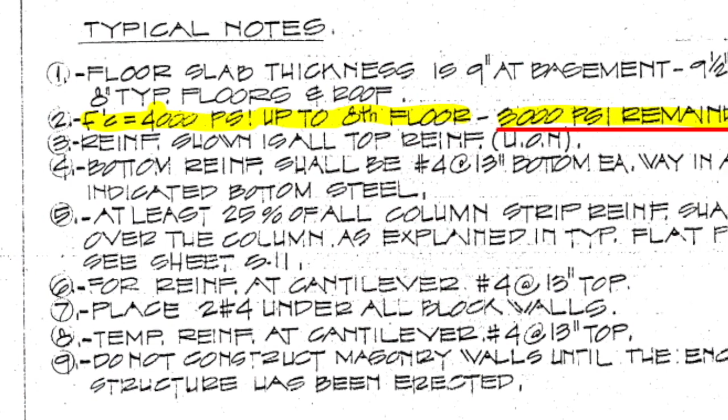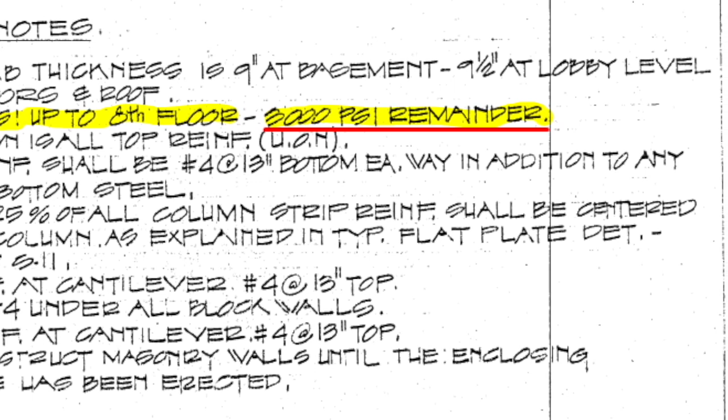And I'm like, wow, that span appears to be pretty long for the thickness of the slab up in the towers. And then also, which seemed a little bit odd, but might have been the case back then, the concrete strength was fairly low, at least what was indicated in the permit drawings. So it initially caught my eye, that they might have something called punching shear stresses that could be on the high side.

Because of what appears to be progressive collapse, what do you believe to be the main contributing factors? Well, of course, this is going to take some time to really see what happened there. And unfortunately, a lot of the evidence is going to be at the bottom of the rubble pile and may actually be destroyed, whatever video evidence there is. But having the existing drawings provides a blueprint to model the building and see if the building itself may have had some design weaknesses that could have contributed to the ultimate progressive collapse or disproportionate collapse of the building.

What might forensic engineers examining the collapse be looking for to determine the cause? What did they do? So with the drawings, as I said, you can start to model the building from top to bottom. And then from those models, you can see, does it meet code today? Did it meet code back then?

From the rubble pile, you can actually start to test some of the materials to see what was actually constructed. Was it constructed with the right strength concrete? Was there a little reserve capacity? A lot of times concrete comes up higher than specified. Hopefully they find some of the reinforcing steel at the base of the building and see if there were any signs of excessive corrosion, in particular in some of the columns and beams at those lower levels.

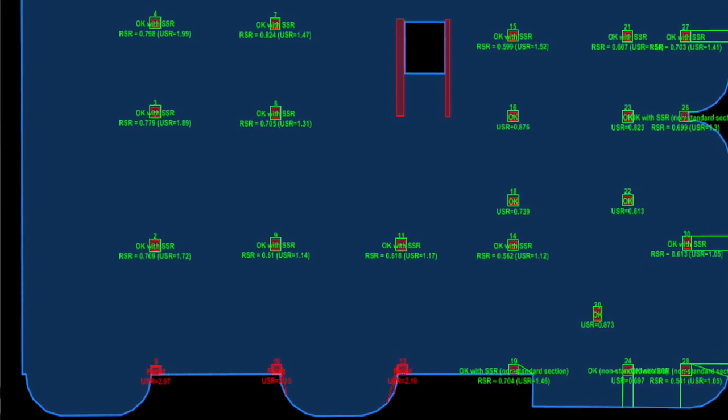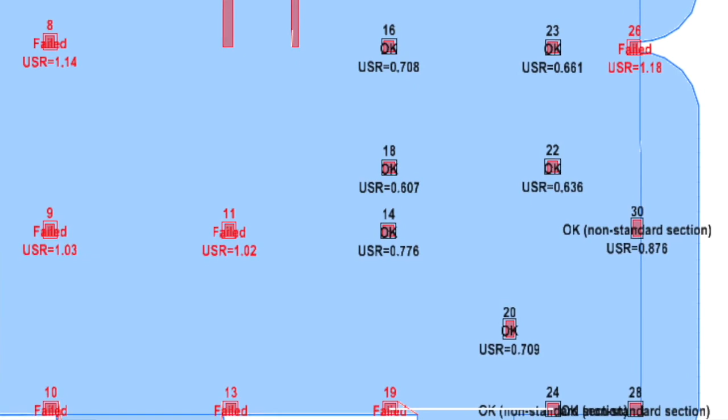So we modeled the floor slab in a 3D analysis software. And actually, it appears based upon loads that would have been used for the design that there might be some punching stresses that are actually exceeding code allowable. Which wouldn't necessarily cause failure, but now you're starting to eat into the safety factors that are inherent in the code that provide some reserve capacity.

Another key and important issue as well is back then, analysis methods that were available were fairly sparse. One thing that was added to the code after that design is something called structural integrity steel. And that was a result of other collapses that had occurred, such as the Murrah building in Oklahoma City, and finding ways to make a building more resilient and redundant and provide alternate load paths.

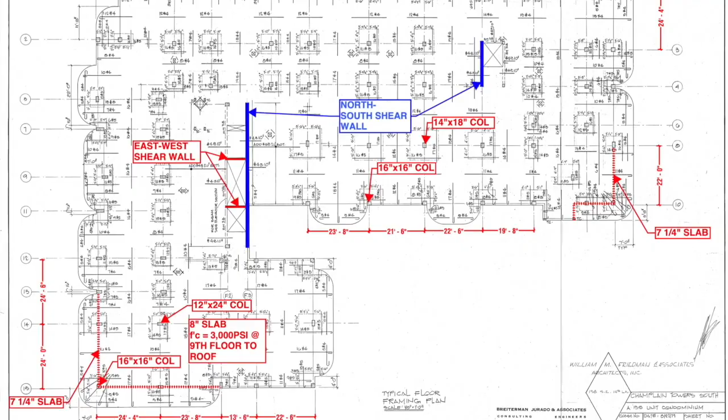So if you do have failure of a column, ideally you don't have failure of the rest of the building. And at that point, no buildings had that in there as part of the design. It would be something that creates a weakness in the building under a catastrophic loading scenario like this. We looked a little bit more through the drawings and found a couple other things that were a little bit concerning. And again, you're not looking to point the finger or blame, but it's something that's worth taking a look at in more detail and analyzing the building as it was built or as it was permitted.

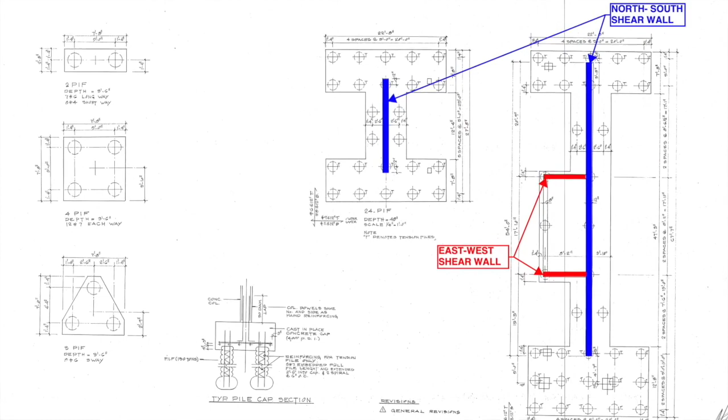Shear walls in one direction of the building were pretty short, and there are only two of them. So what may have happened too is if something failed somewhere else in the building and started pulling the building sideways, the slab column joint would have now been helping with lateral capacity in the building, which could have overloaded the columns and the slab column joint in punching shear. Of course, I'd imagine over 40 years, this building has been through some decent wind occurrences, so it must have enough capacity for that.

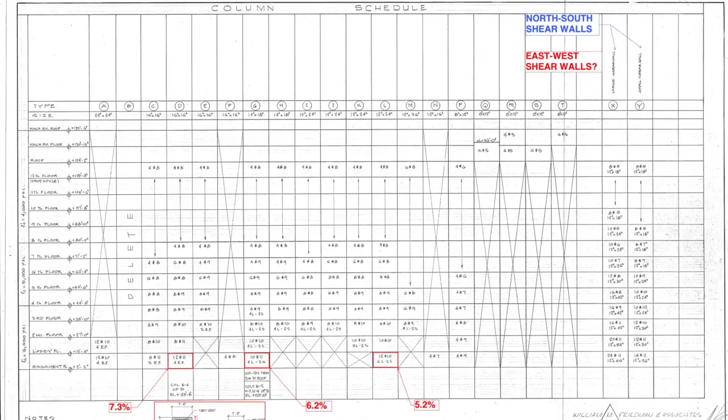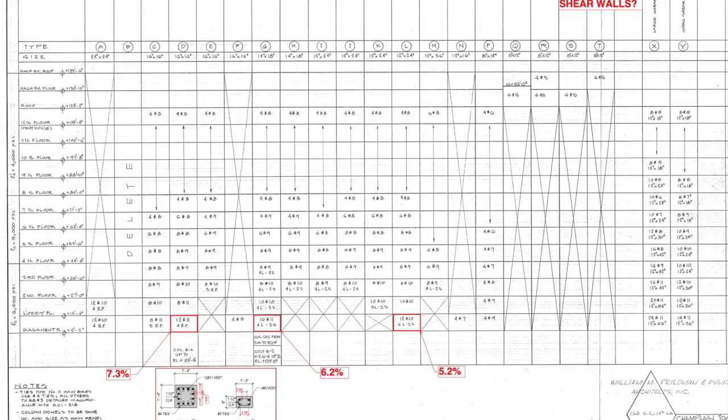Some of the witnesses who were in the building once said the building swayed like a sheet of paper. And that may have been due to the fact that the shear walls in one direction were really pretty sparse. The other thing that we noticed is that some of the columns at the base of the building retained their small size and were very heavily reinforced. And if special mechanical splices weren't used for that vertical reinforcement, by code, they actually might be considered over reinforced, which is not necessarily a good thing. Sometimes too much rebar is not a good thing.

So getting concrete consolidated around the rebar and the splices gets difficult with the more steel that you put in there. And judging by some of the photos, there was punching shear failure at the ground level. So it could be that one of those smaller columns, once it lost the lateral support of the slab, all of a sudden under that high compressive load, it wanted to buckle sideways, and there was nothing to keep it from moving. And that could have led to loss of a column and then collapse throughout the building.

What are high punching shear stresses and punching shear failure, and how may they have been a factor in this collapse? So a flat slab, this is from the permit drawings at least, this appears to be a reinforced concrete flat slab, about 8 inches thick in the tower. And all the loads from that slab have to somehow get from the slab into the columns that support them. And there's essentially a zone or a ring in that slab where you're looking at the shear stresses as those loads transfer into the column.

And if there's not enough thickness or there's something else going on at that joint, you can actually have a shear failure. And it's very unfortunate because shear failures don't give much warning and the results are very catastrophic. So for example, if you have flexural overstress in a beam, you'll typically see the beam starting to deflect too much. You'll see cracking appearing in the bottom of the beam or maybe in the top of the beams at the support, but you have some warning that something's going on, just like they did with some of the corrosion.